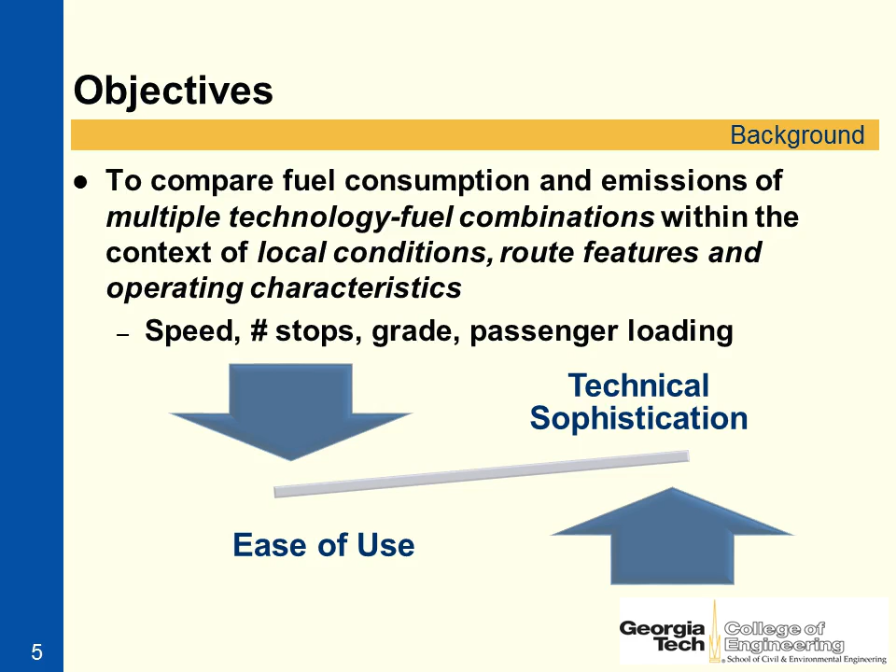We wanted the model to have enough technical sophistication, but at the same time be very easy to use. To achieve this, we chose the activity-based bottom-up approach as our modeling approach.

So a little more background on this. There are two primary approaches when it comes to estimation of fuel consumption and emissions. The first one is the fuel-based top-down approach, based on fuel use or average fuel economy. The famous GREET model and the Fleet Footprint Calculator use this approach.

Also, the Travel Matters emission calculator by the Center for Neighborhood Technology uses this approach too. And the other approach is the activity-based bottom-up approach, which EPA's MOVES model uses. These two approaches are both valid and should match up very well when the analysis is done right.

We chose the bottom-up approach because it's capable of analyzing the effects of different operating scenarios in a specific area. So in the transit context, for example, it is often not possible to obtain fuel receipts for a bus on a specific route, because normally a bus would serve several routes, at least two routes on a particular day.

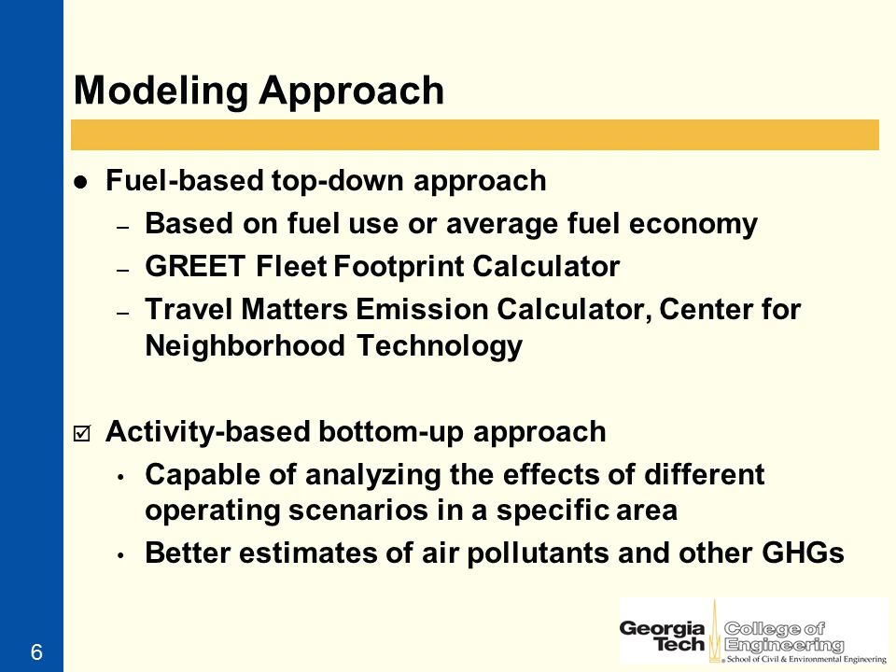Also, this approach gives better estimates of air pollutants and other greenhouse gases than CO2, since these emissions are often related to emission controls instead of fuel consumption.

Using this approach, we evaluate both bus technologies and rail technologies. There is a plethora of technologies we include in the calculator, including the conventional engines, the battery electric buses, hybrid electric buses, plug-in hybrids, and hydrogen fuel cell. And in terms of fuels, we include gasoline, diesel, CNG, different biodiesel blends, and of course electricity for battery electric and hydrogen for fuel cell.

And for rail, we include all electric technologies, which are light rail, heavy rail, and streetcar, and also diesel electric technologies, which are primarily commuter rail.

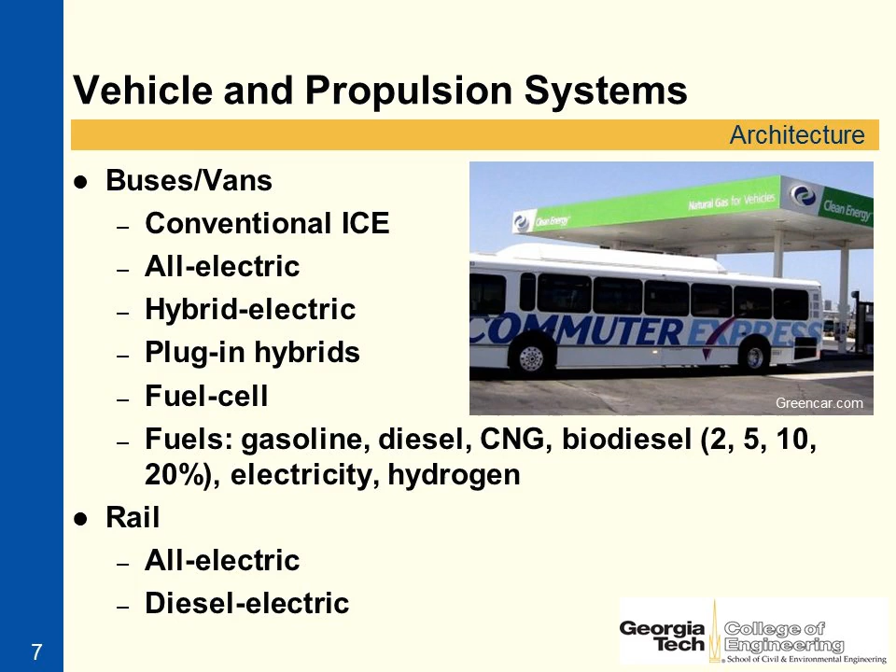So now let's take a look at the architecture of the calculator. The calculator has 4 modules, in total 10 components.

It's a spreadsheet-based model, and at the very beginning, FTA was very specific about this model having no macros and should be able to operate on Excel 2007. So we built the model to that specification. Being a spreadsheet model, anybody can download it. And anybody can use it.

So let's go through and take a look at some of the inner workings of each module. Before I go into that, I wanted to explain how generally the workflow goes. First of all, there is the scenario setting module that gives the context of the geographic location of the transit agency. It processes the meteorology and terrain for the location of the transit agency.

And then these inputs feed into the energy consumption modules, which include the scaled tractive power processor, the hybrid energy model, which deals particularly with hybrid technologies, and the rail duty cycle model, which deals with rail technologies. And then the energy consumption results go into the on-road emission rate modules, which include a MOVES matrix for bus technologies and rail emission rates.

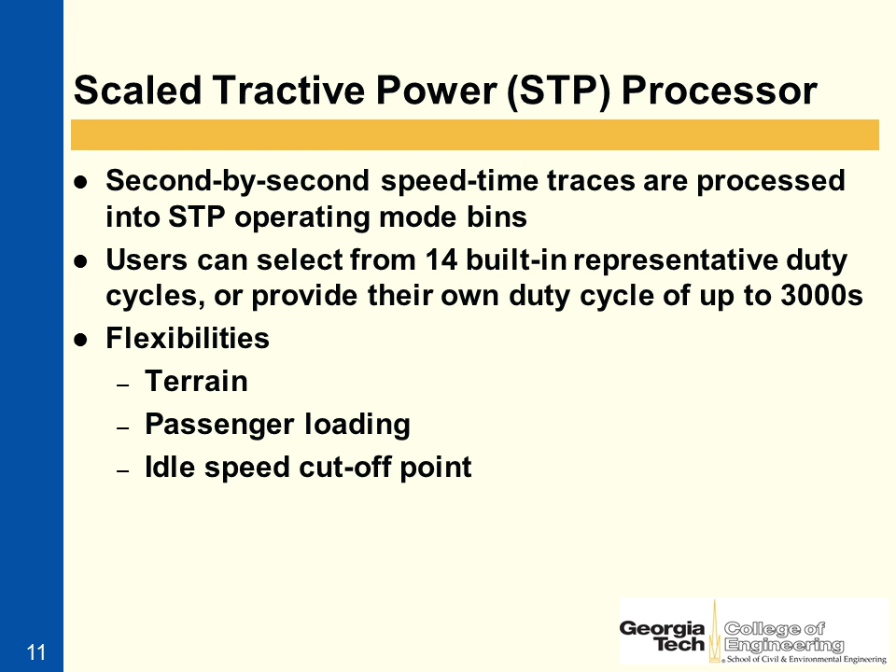The spreadsheet calculations translate second-by-second speed time traces into operating mode bins. And we have 14 built-in representative duty cycles that users can choose from, or users can provide their own duty cycle of up to 3,000 seconds. This is a very convenient feature because nowadays with modern-day technology, a transit agency can easily use a GPS logger and record their own duty cycle so that they can have their agency-specific duty cycle for analysis.

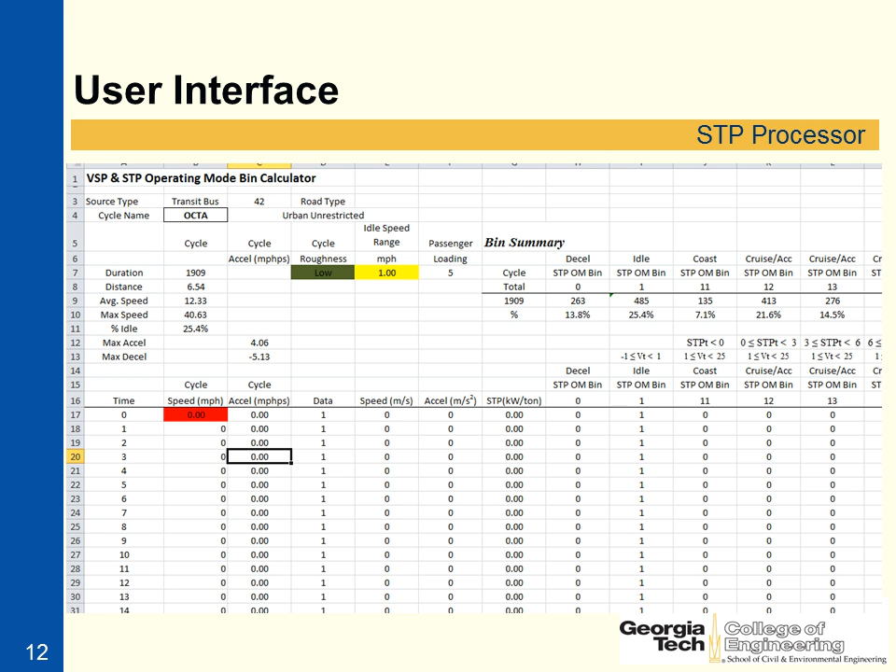So a little bit on the hybrid energy model. The hybrid energy model incorporates motive power distribution between the conventional engine and the electric motor, and we'll also consider the energy recovery through regenerative braking. And the goal here, even though we calculate the balance for each second of the duty cycle, the goal is not for this calculator to be a high fidelity simulation tool. Instead, we strive to achieve overall accuracy at the duty cycle level.

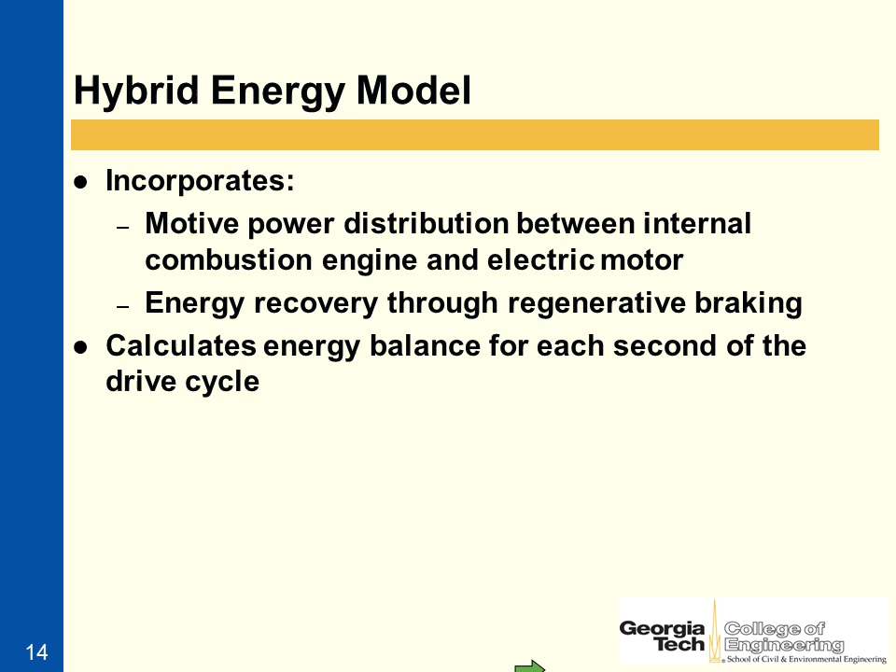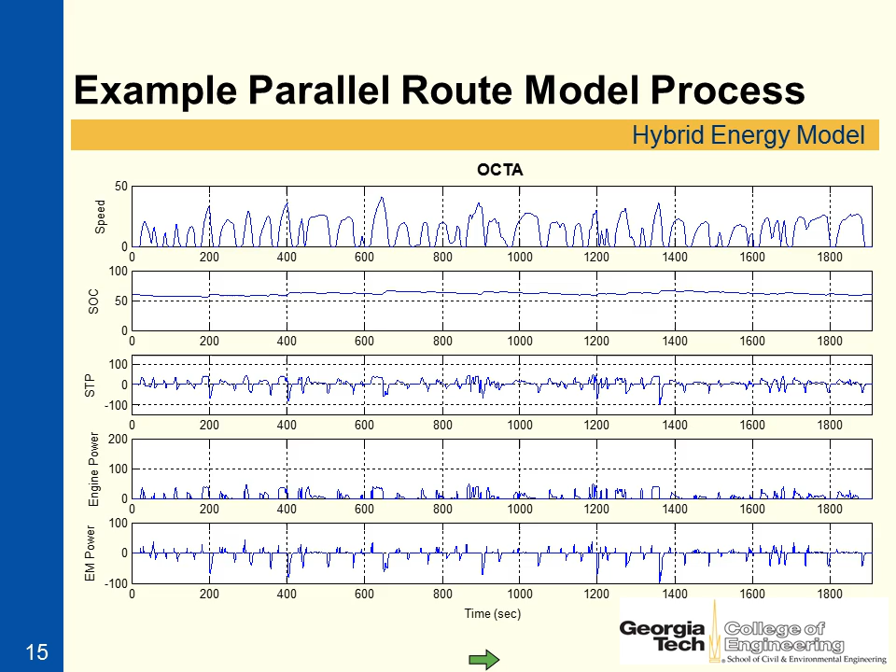The rail duty cycle model includes two models: one separate model for the diesel electric transit trains and one separate model for all electric transit trains. And again, the rail model utilizes second-by-second trip data as well, and it considers a lot of different inputs specific for rail technologies, including track grade, wind resistance, and weather conditions.

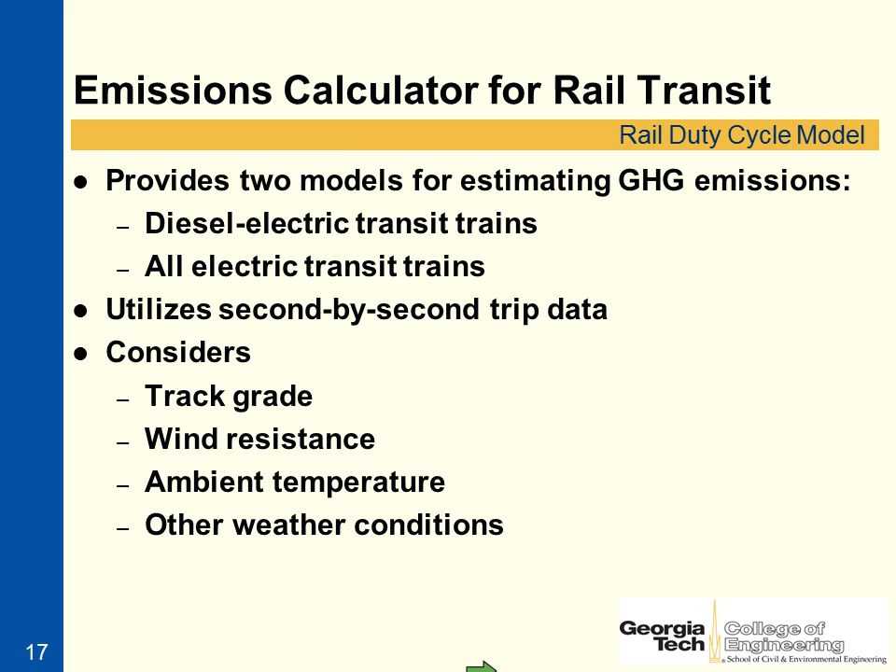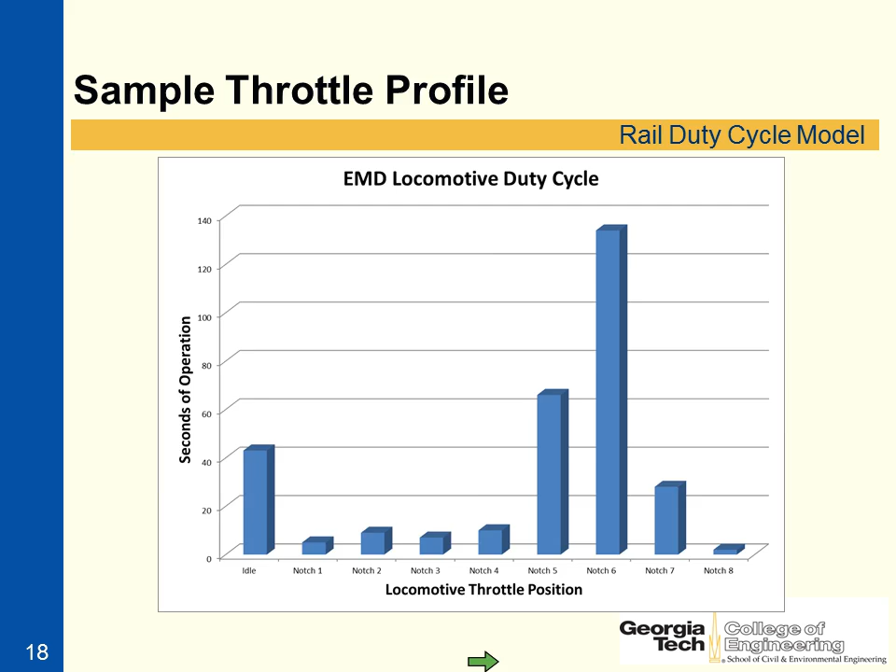And this is a quick example of how we would process a speed time trace for a rail and translate it into a throttle profile, and then link the distribution to the rail emissions and get the fuel consumption and emissions. And then I wanted to introduce the MOVES matrix that's embedded in the calculator.

And this is a very powerful component of the calculator. We ran MOVES 4,320 times for this particular version, and in our current work, in which we're expanding the calculator, we're running MOVES a lot more times, tens of thousands of times. So MOVES is run in project mode with different combinations of fuel, temperature, and operating mode bins.

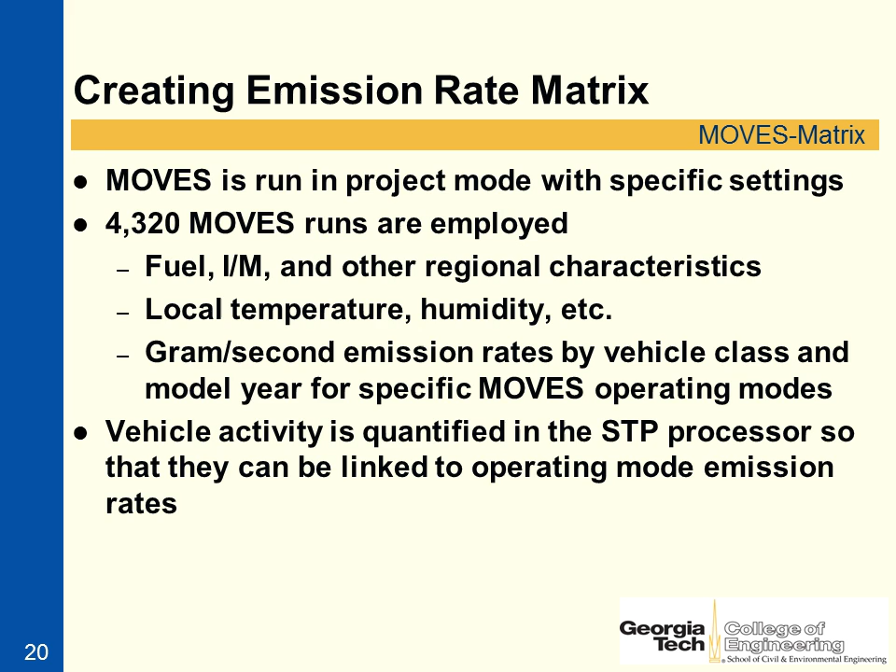So the vehicle activity, which is quantified in the STP processor, is now linked to the operating mode bin emission rates. And this is a screenshot of the matrix. This is just a corner of it, and so we basically look up the emission rates, and these numbers are the pollutant IDs as they appear in MOVES. So we look up the emission rates by the source type, which is the type of vehicle, and by the operating mode bin, the model year we're examining, and the fuel.

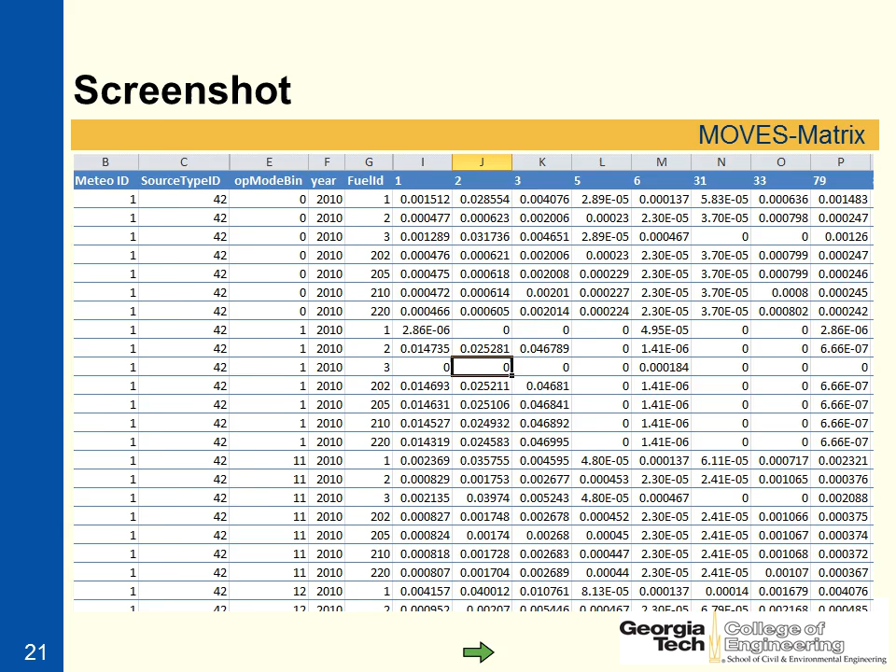So I won't spend too much time on the details of the model. I wanted just to point out that we verified the modeling results in two published papers for bus and for rail, and our results fall within reasonable ranges according to prior research.

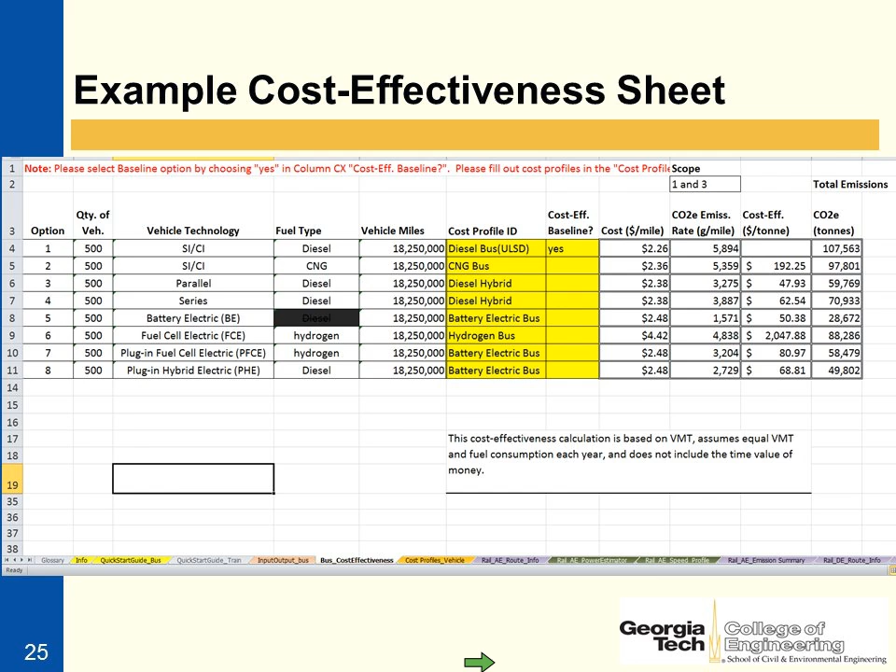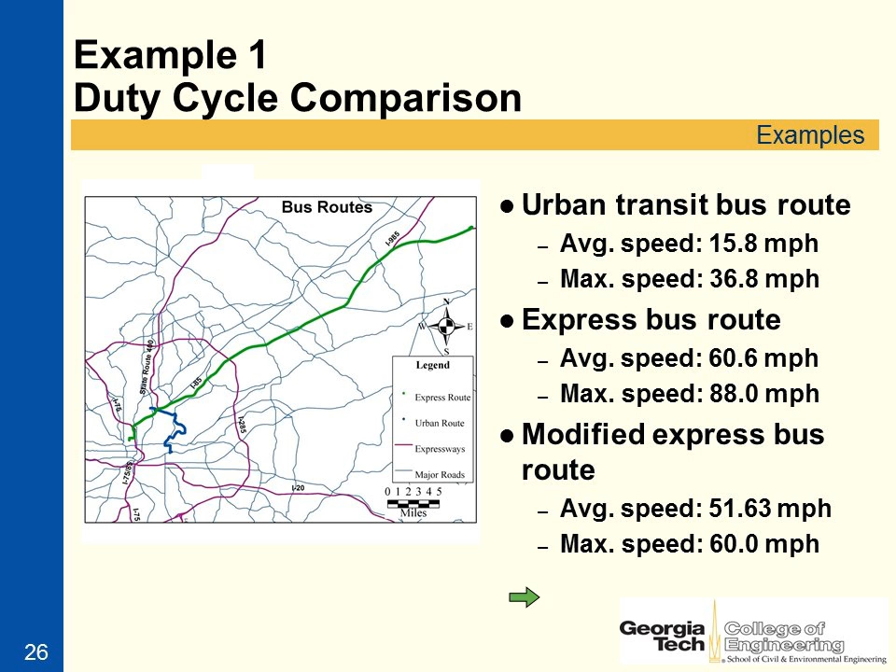So these two routes have very different operating parameters, even though they're both in Atlanta. The blue route has an average speed of 15.8 miles per hour, and the green route has an average speed of 60 miles per hour because it's mostly on the freeway. And we also modified the express bus route because when you want to compare alternative technologies such as battery electric buses, they are not able to operate at a speed higher than 60 miles per hour normally.

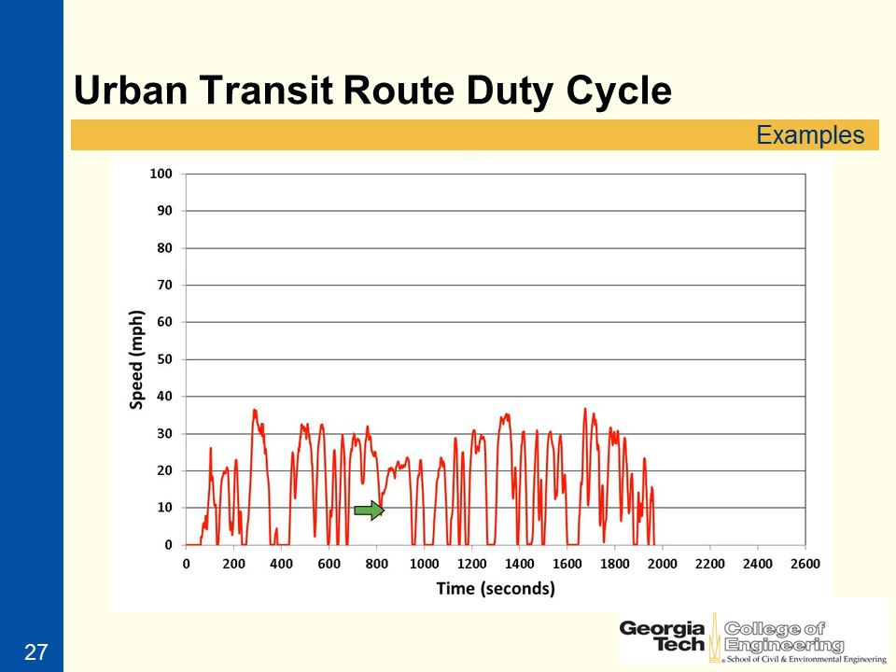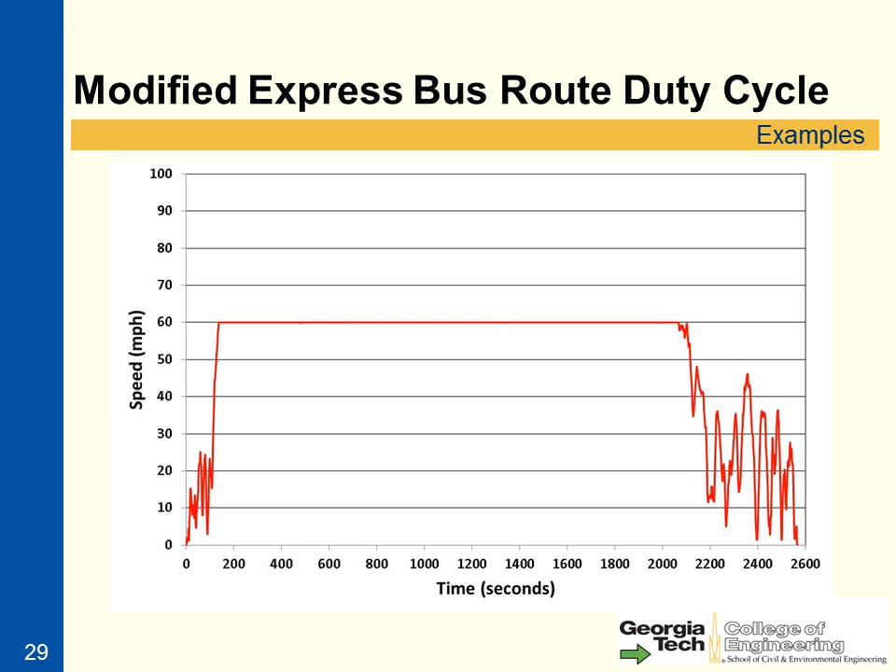So in order for a fair comparison for the battery electric buses to operate, we arbitrarily stretched this duty cycle and capped it at 60 miles per hour so we could get reasonable comparisons. So this is the result from the calculator. It's published in a conference proceeding by ASCE.

So what I wanted to point out here is the relative performance between the hybrid technologies and CNG, for example. For the urban bus cycle, you can see the advantage of hybrid technologies over CNG, but on the contrary, for the express bus cycle, CNG performs much better than the hybrid technologies. And this is an example to show that a transit agency's decision for fleet planning really depends on the type of operations they run.

And the next example I wanted to show concerns geographic locations, and I chose San Francisco, California, Phoenix, Arizona, and Atlanta, Georgia as examples. The three locations have different electricity generation mix, and very different terrain. San Francisco is very hilly. Phoenix is mostly flat. Atlanta is somewhat hilly, but not nearly as hilly as San Francisco. And the three cities have very different summer weather as well. San Francisco is mild. Phoenix has dry heat. Atlanta is very humid.

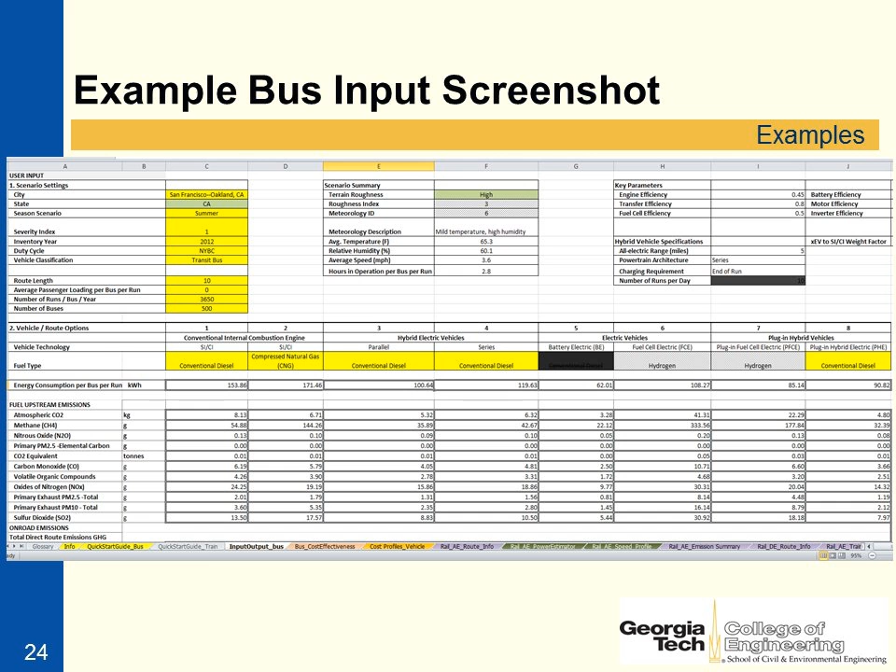Right now, within the calculator, it's down to state level. So the calculator itself, just by automatic calculations, cannot reflect anything finer than state differences. But it is possible for an advanced user to go to the eGrid tab, if you have the tool available. The eGrid tab has the electricity emission rates. So an advanced user could go in there and change the default values to whatever is suitable for their own conditions.

And then I guess a similar question would be for other fuels that might be used. For example, hydrogen has a variety of different production pathways. Yes, absolutely. So for hydrogen in our calculator, we use the default inputs from GREET. So it's assuming that hydrogen is from North American natural gas, and if a transit property has a different source of hydrogen, you can go into the GREET lookup sheet and change the default.

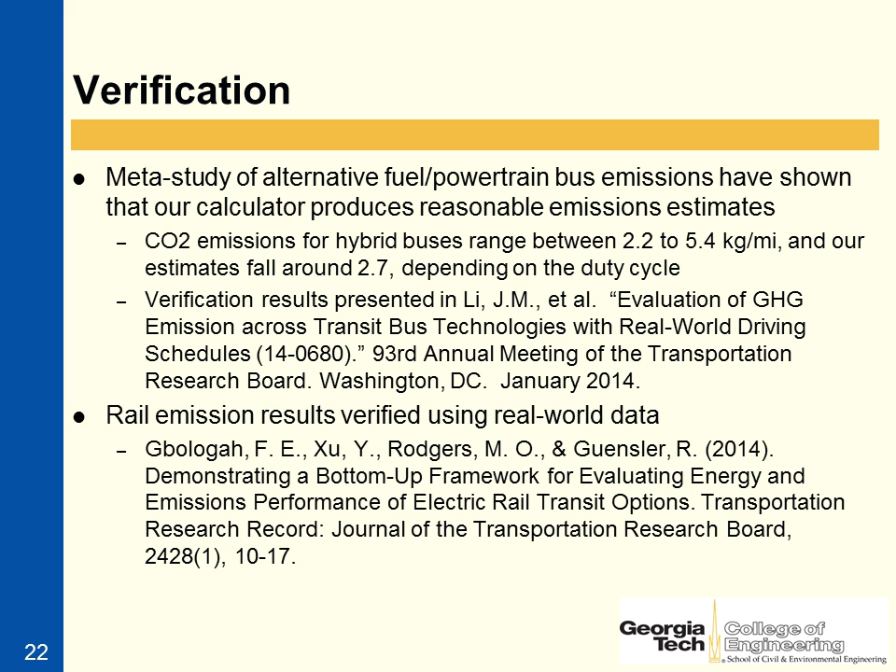This is a question about, you'd mentioned that this was presented at ASCE, and I guess the question was, was there a paper that was associated with that? And then a comment: I could see wanting to share this with transit operators in our region for the purposes of fleet decisions and fleet purchases. So that's a question, and then actually I would invite Tommy to reflect on that latter part in terms of how this might be used to inform the fleet purchases.

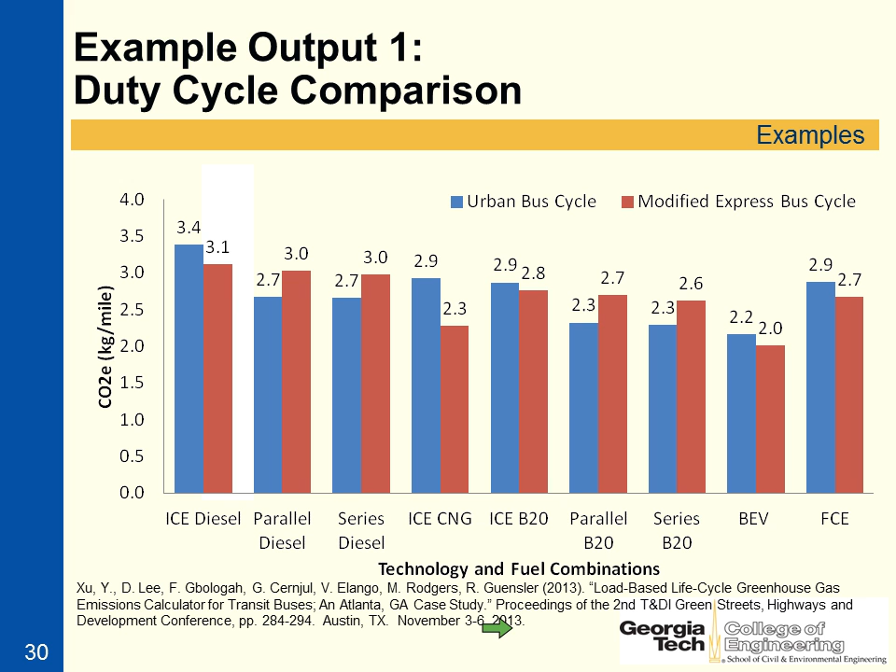So first to you, Dr. Xu. Yeah, that's wonderful. So I listed the references here on this slide. This paper is published as a conference paper, and I believe you can find it if you just type in this reference and download it from the ASCE website. And similarly, this chart is actually from a paper as well, and I have included the reference here as well.

Great. And Tommy, do you have any thoughts on just sort of the nature of fleet purchases and the way in which this could be used for that? I think primarily this opens the door to be able to do some modeling specifically for your property and your route structures that would help with planning of fleet purchases. So I believe the way I would see it being used more is in the aspect of what technologies meet the criteria that the agency's long-range plan is going to be moving towards.

So again, it would have been nice to have had a tool like this in the past. Now that we see there is a tool like this available, I think it's going to be very important that it gets out to the properties and how they may be able to use this when they're planning the technologies that they are looking at using in their bus and fleet purchases. So I see it as a great tool moving in that direction.

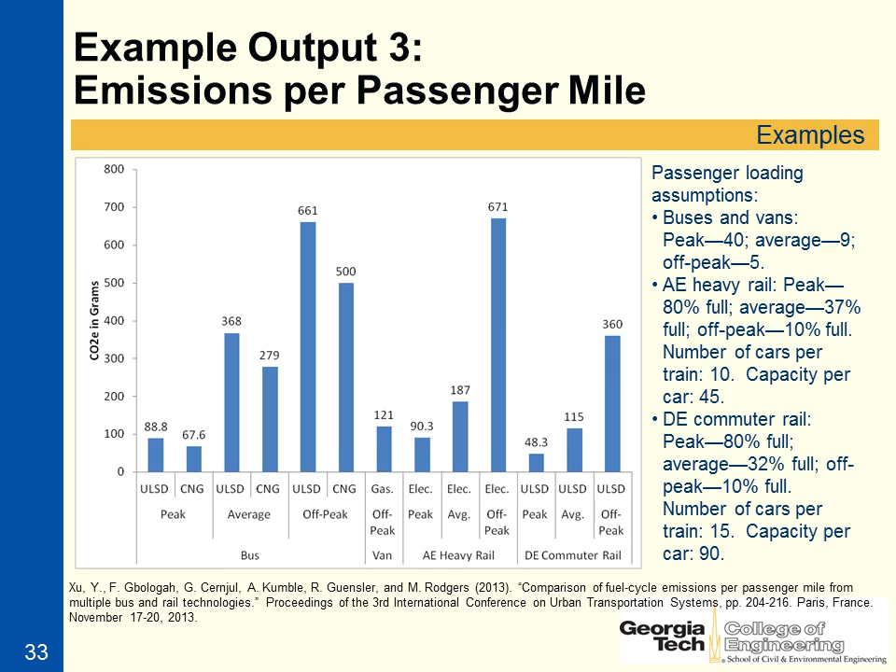So it comes back to the idea that you really ought to evaluate your options within your own context, because a lot of these characteristics - their effects are not additive, if that makes sense. For example, if a hotter climate requires higher fuel consumption, yet a flatter terrain requires less, the relationship is not linear. You can't just say a hotter climate plays a more important role - it depends on how hot it is and how rough the terrain is.

Yeah, those are great points. I was going to ask you to define duty cycle, but I think you sort of did there - it's reflective of the operational characteristics of the vehicle, which includes speed, acceleration, distance, and terrain, and of course climate as well. So that's great.